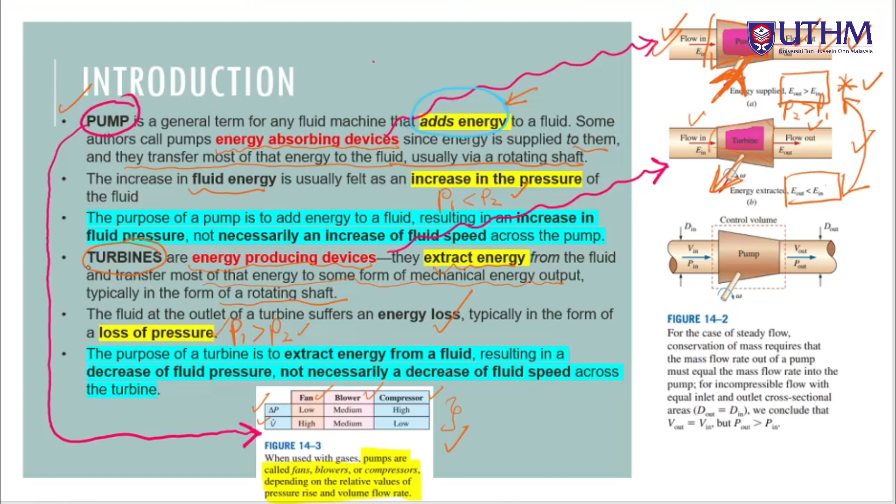Okay, which means that the fluid at the outlet of a turbine suffers energy loss, typically in the form of a loss in pressure. That is why P2 can be considered much lesser than P1. So you guys need to understand what is the differences between pumps and turbines. So they are opposite. Okay, so next kita focus on pumps.

So in details, you guys tak perlu tahu banyak sangat. Kepelbagaian pumps ni pun you guys boleh tengok dekat YouTube lah. So in this chapter kita bukannya nak fokus sangat kepada perbezaan pumps. Cukuplah sekadar few yang saya akan tunjuk kemudian. Yang lain-lain tu, as long as you guys know that there are variety of pumps, that it should be enough.

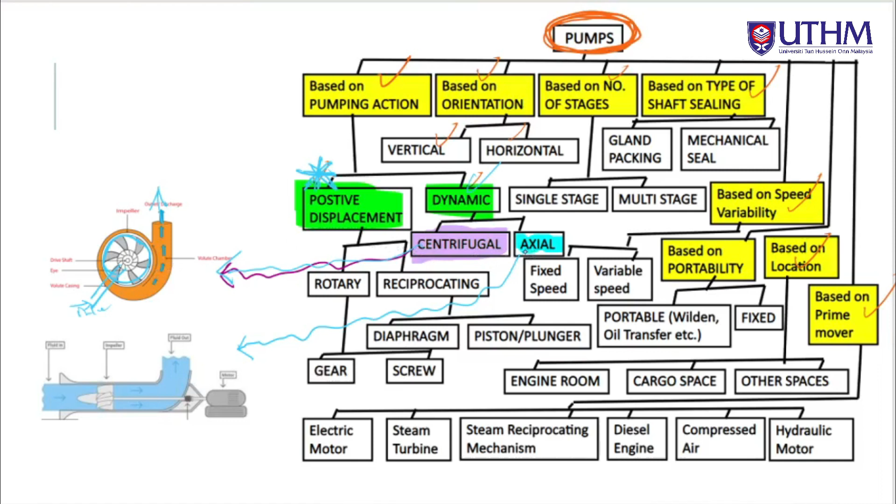Untuk axial pump pula, dia lebih pada straightforward lah, okay, inlet and outlet. Lepas tu kat tengah ni impeller dia bergantung lah kepada bentuk dia.

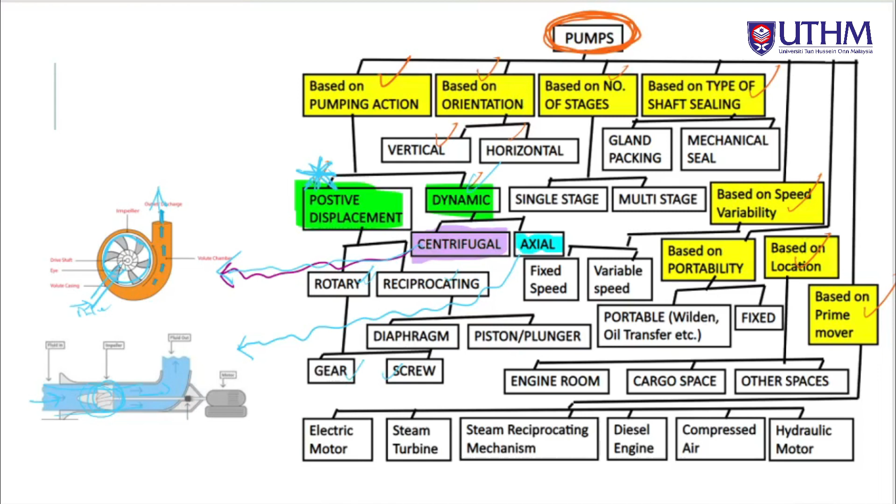Alright. So okay. Kalau kita tengok dekat sini, bila cakap pasal positive displacement ni, dia pun ada dia punya bentuk-bentuk juga, sama ada rotary ataupun reciprocating. Okay, so bila rotary ni pula ada bentuk-bentuk gear dia, gear, screw and so on so forth lah. Okay, banyaklah perbezaan dia dari segi dia punya classification. So this is the positive displacement pump.

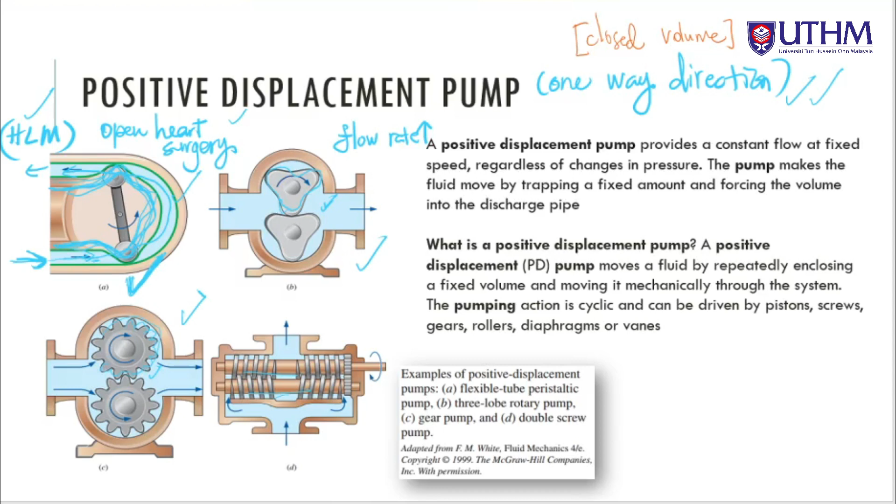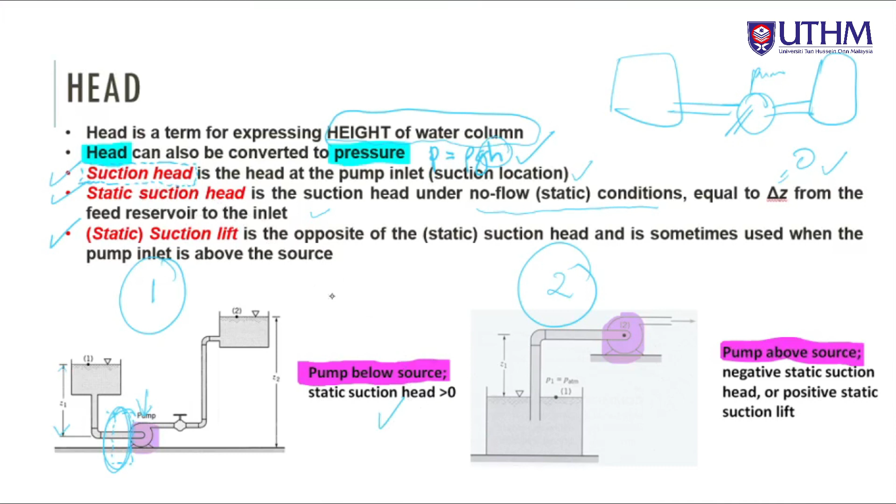So if let's say the position of the pump is much lower, this would be the situation in which static suction head will be more than 0. And then there's the second case which we consider as static suction lift, which is actually the opposite of the static suction head, and is sometimes used when the pump inlet is above the source. So we see the pump inlet is also higher than its source. This is sometimes called a positive static suction lift or negative static suction head, which is the opposite of the static suction head.

So we see here there are two, so don't be confused about these two definitions. They're the same. If you want to use a static suction head, you can either say positive or negative. If it's like this, it's positive. The first condition is a positive suction head. If it's here, negative suction head or positive suction lift.

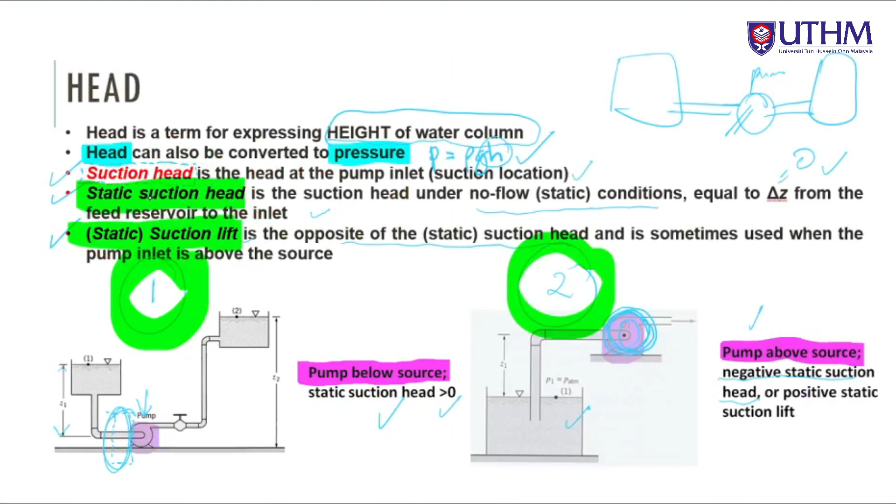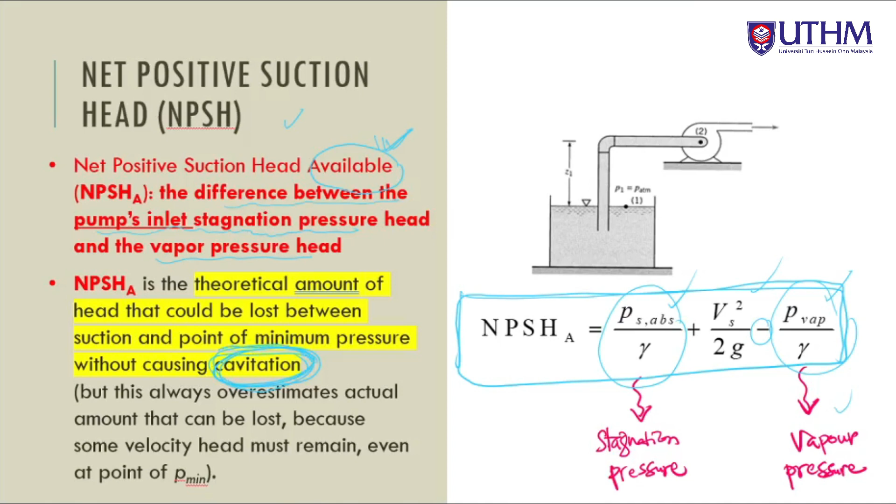So how can this cavitation occur? So it will occur when the local pressure inside the pump is much less than the vapor pressure of the liquid. So maksudnya vapor pressure dalam liquid tu sendiri, vapor pressure dia lebih tinggi daripada pressure dekat pump. So this is called cavitation bubbles, in which the liquid boils locally.

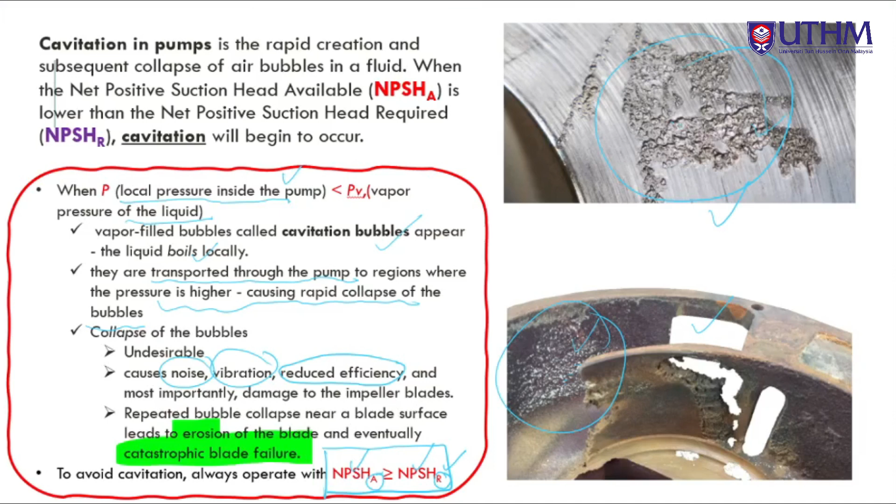In order to avoid this cavitation, all the bubbles that are trapped in the impeller and cause this catastrophic blade failure, the suction head available must be more, or at least the minimum should be equal to the one that is required. Okay, next, this is the net positive suction head required. Yang ni yang required tu lah. It is actually the minimum value of NPSHA, sebab kita cakap tadi kan, NPSHA must be more than or equal to NPSHR. So it is the minimum value of NPSHA that is needed to prevent the cavitation.

Okay, so usually this NPSHR that is required ni adalah spec yang diset up oleh manufacturer. Okay, and it is determined experimentally by pump manufacturers and reported as a function of pump flow and so on and so forth lah. To avoid cavitation, the pumps always need to operate with NPSHA more than or equal to NPSHR. Yang ni kita akan go through lebih detail lah bila kita tengok pump performance curve.

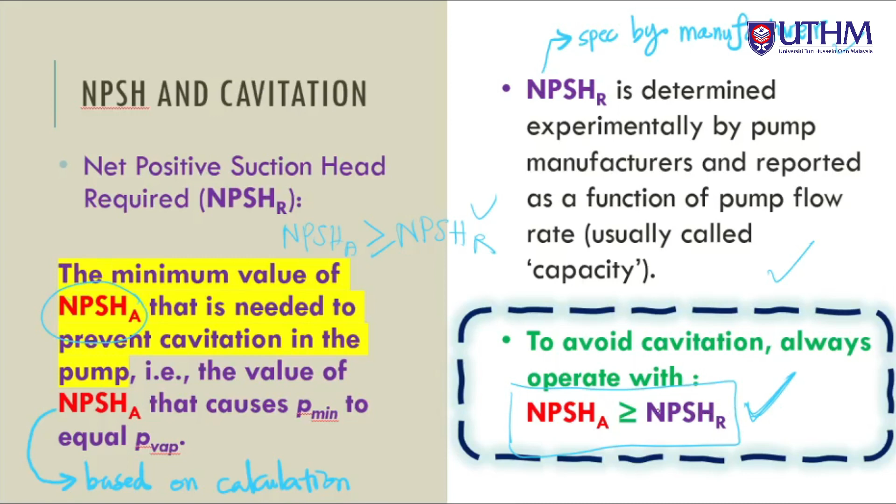Alright, so the maximum allowable elevation of a pump. So yang ni kita nak tengok berapa jauh tinggi Z1 ni daripada this reservoir, daripada inlet kepada pump ni, berapa maximum allowable elevation of a pump based on theoretical knowledge yang kita dah tahu tadi, NPSHA must be more than or equal to NPSHR. Daripada sini kita boleh determine the maximum allowable elevation of a pump. Berapa tinggi pump ni boleh kita position daripada dia punya reservoir.

Okay, so rumus yang kita dah tahu tadi kan, NPSHA equals to this. And then this absolute stagnation pressure kita boleh ganti with this term, in which kita consider this suction lift, this elevation kat dalam this equation, and then kita minus all the losses juga, and also the kinetic terms, and then kita replace balik masuk dalam this equation. Kita akan dapat in the end this. So this is actually the NPSHA, which itself must be more than or equal to NPSHR.

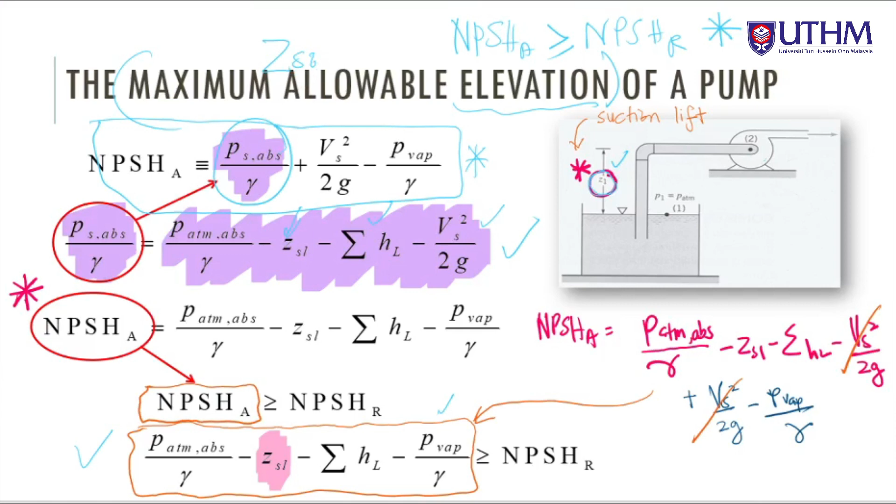So the one that we would like to determine is the maximum allowable elevation of a pump, which is the elevation of suction lift lah, ZSL. So kita just rearrange so that ZSL is what we wanted. Thus this suction lift must be less than the expression on the left. Okay, so yang ni mesti less daripada ni in order to avoid cavitation, kan?

Sebab rumus yang kita guna, saya ulang banyak kali lah, NPSHA is more than or equal to NPSHR. So dari sini kita rearrange, kita dapat ni. So this ZSL must be less than or equal to the left hand side terms, so that expression indicates the maximum allowable suction lift. Berapa maximum elevation of the ZSL can be positioned above the reservoir. Okay.

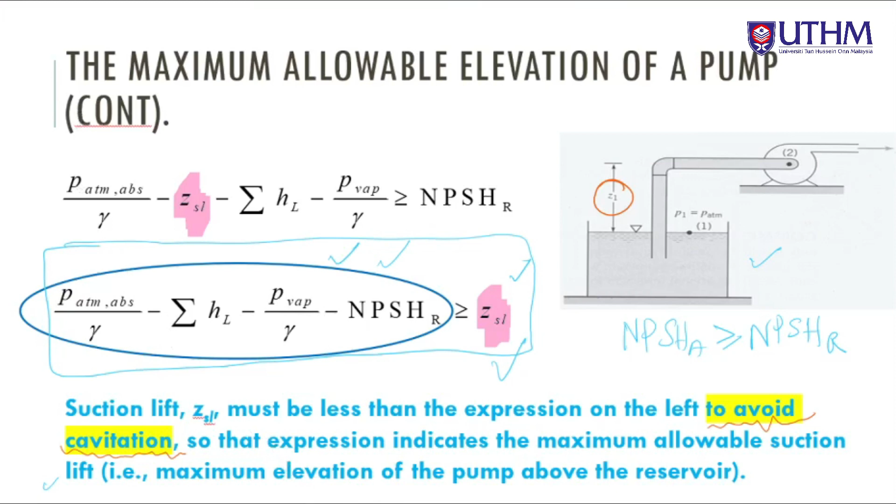Okay, now let us continue untuk chapter 7 ni. Okay, sekarang kita masuk kepada pump performances. How we describe or kita judge satu-satu pump performance tu. Okay, so for incompressible flow, it is more common if let's say kita guna volume flow rate. Selalunya kita akan guna volume flow rate lah, as compared to the mass flow rate.

So what is the, orang panggil dia punya simbol for the volume flow rate adalah V dot ataupun Q lah. Okay, kita can use either one. Kalau mass flow rate is M dot. Okay, so in the turbomachinery industry, this volume flow rate is sometimes called as a capacity. So this volume flow rate can be also considered as capacity, and is simply mass flow rate divided by fluid density. So this is the equation lah. Okay, the volume flow rate equals to the mass flow rate divided by the fluid density.

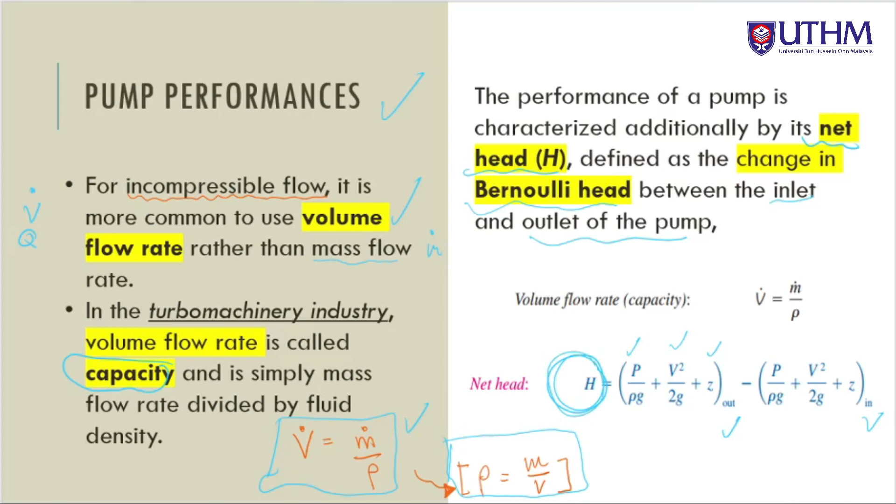And the performance of a pump is characterized by its net head. Okay, net head, which is defined as the change in the Bernoulli head between the inlet and the outlet of the pump. So basically nak dapat the net head ni, the net head equals to outlet punya energy minus the inlet punya energy, and the equation is sama lah, P over rho g plus V squared over 2g plus z, minus dekat inlet punya energy. Okay, this is the net head yang kita guna pakai untuk assess the performance of a pump.

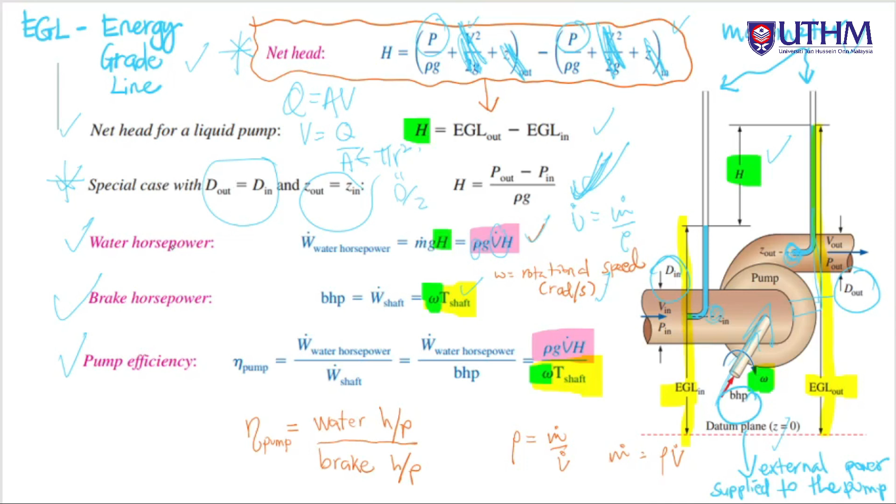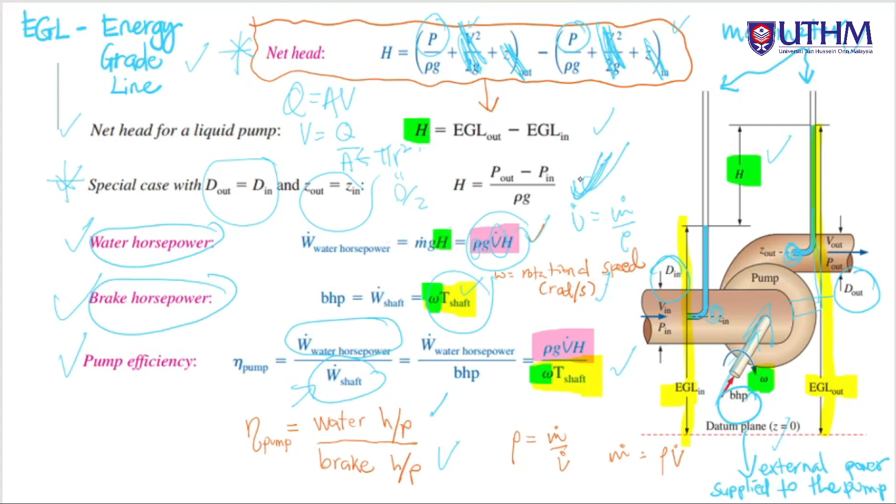Alright, and then the pump efficiency equals to the water horsepower over the brake horsepower. The brake horsepower is what is given, sepatutnya the maximum. Water horsepower ni apa yang dah diguna pakai dalam pump tu. So this divide by this, kita dapat the efficiency of the pump. Water horsepower divide by the brake horsepower. This is how we calculate the efficiency, which is represented by the graph tadi.

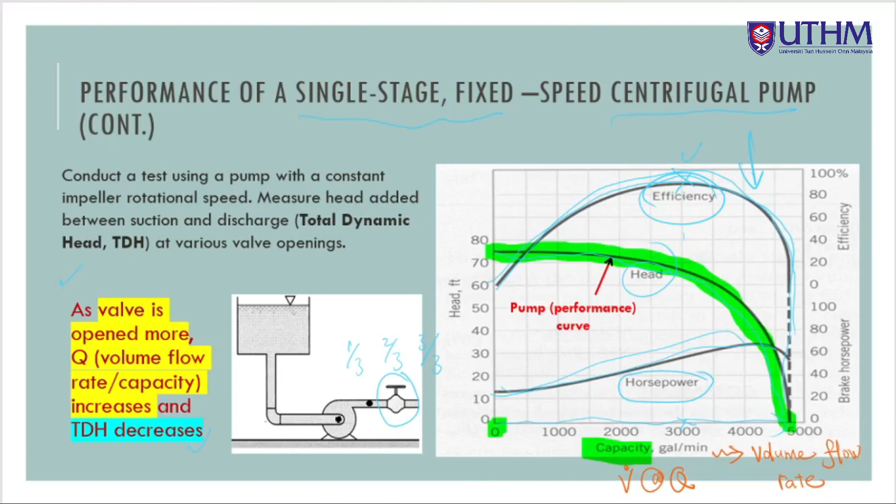Alright, and then this is the pump performance curve in general. Kalau kita tengok dekat graph ni, kita boleh extract banyak maklumat. Dekat sini kita akan pecah kepada tiga important parts, sekejap, saya nak guna color apa ni. I use this color, light grey. So kita akan discuss what happens at the free delivery, what happens at the shutoff head, and what happens at the BEP, at these three locations.

So first of all, kita consider pump free delivery. At pump free delivery, this is the maximum volume flow rate. Paksi X adalah capacity ataupun volume flow rate. Dekat paling tinggi, head is 0. H will be equal to 0 on this blue line graph. So this flow rate is called the pump's free delivery. Maksud dia at maximum ni pump macam tak diguna pakai, that is why head is equal to 0. Free flow dalam pipes tu. No flow restriction at the pump inlet or outlet, no load on the pump. So bila no load, no head dekat pump tu.

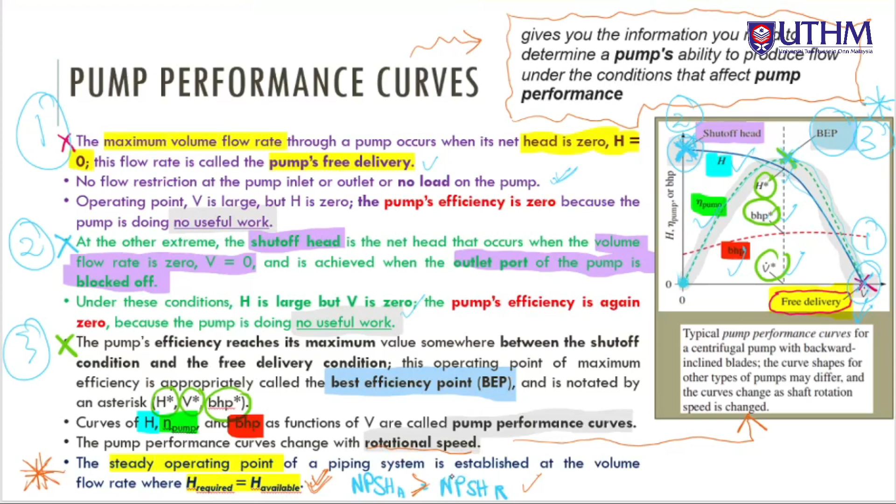Okay, so this part pula macam mana kita nak matching a pump to a piping system. Kita ada satu piping system. Piping system kita pula bukannya macam horizontal satu bentuk je kan. Dia bermacam-macam bentuk untuk meet requirement dekat satu tempat tu. Okay, so in this slide dia akan tunjuk macam mana kita nak match this pump into this piping system.

Okay, so a general piping system with elevation, dia mesti ada elevation change, ada major and minor losses, and fluid acceleration. Kalau kita tengok dekat sini kan, elevation mesti ada lah kan. Lepas tu major and minor losses, apa yang kita boleh tengok kat sini. So major losses dia of course daripada friction lah dalam pipe tu. Lepas tu minor losses dia daripada this valve, or also the orientation of these elbow pipes and so on kan. Okay, and also the fluid acceleration. Okay, so in order to find the H pump atau H required, and for the spec of the pump, the H value yang kita nak dapatkan kat sini kan, H required atau H pump tu kan.

So apa kita kena buat, kita guna rumus Bernoulli, biasa rumus ni lah juga. Okay, in which untuk yang ni kita dah combine dah sebenarnya daripada rumus ni. Okay, so kita ada pressure terms, the kinetic terms, the elevation, and also the total loss. Total loss ni yang they include major and minor losses. Okay, where we assume that there is no turbine in the system, although that term can be added back if necessary. So if turbine, kita kena consider jugalah.

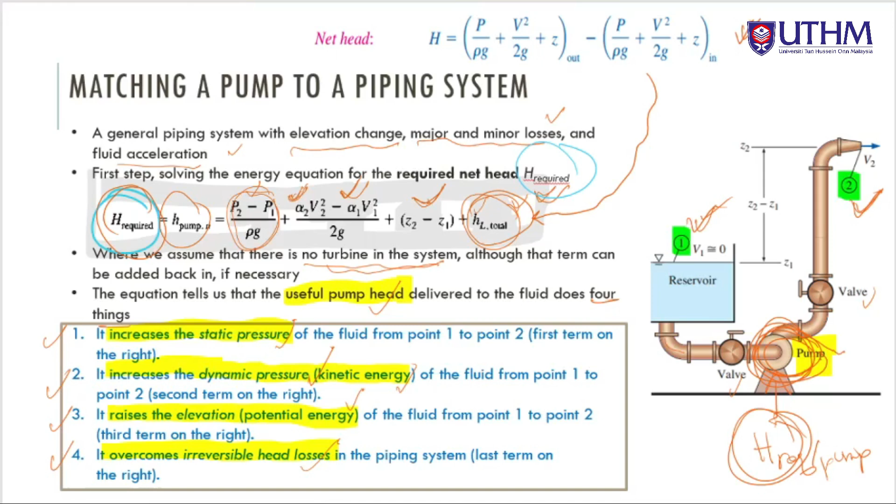Okay guys, before we end this chapter, I'm going to show you one example of questions related to this topic. Seperti yang saya dah cakap sebelum ni, bila kita kata pump system, dia mesti ada interrelated dengan pipings, kan? So chapter 7 pumps dengan chapter 6 last time is analysis of flow in pipes. So mesti ada interrelated. Dalam satu-satu soalan tu kita kena masukkan kedua-dua kefahaman kita waktu flow dalam pipes dengan penggunaan pumps dalam satu soalan yang sama.

Contoh adalah soalan ni. So soalan ni agak panjang, so it might take time lah untuk sama-sama kita fahamkan. Okay, tak apa, kita go through satu-satu. So the question, a local ventilation system which includes hood and exhaust duct. So kita ada hood dekat sini, lepas tu ni semua exhaust duct lah. So yang ni is used to remove air and contaminants produced by dry cleaning operation.

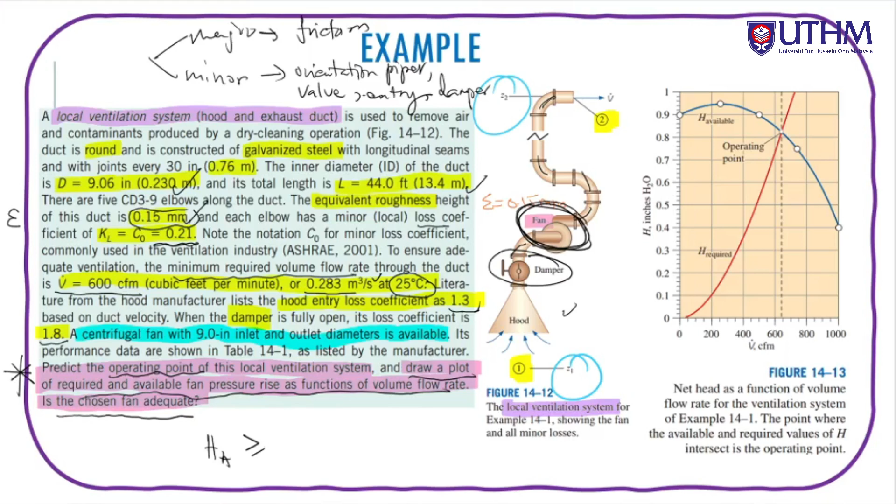Kan kalau kita cakap dulu last time, in order to avoid cavitation, HA must be more or equal to HR. So available operating head, operating point dia mesti lebih besar atau sama dengan HR. So HR ni adalah minimum value untuk HA ni. Alright, so ini sepatutnya untuk soalan ni you guys need to draw this graph lah.

This is, kalau semua masih ingat, this is the pump performance curve. Okay, this is given actually, cumanya kat soalan ni maybe dia tak complete, so this is actually given. Kan dia kata kat sini apa? Draw a plot of required and available fan pressure rise as a function of volume flow rate. And this is the volume flow rate, the x-axis, and the y-axis is actually the operating or available head lah. Tapi yang ni kita tengok dalam unit water, okay.

So how do we start? Okay, firstly kita kena dapatkan poin-poin penting lah. Kan kalau kat sini actually dekat soalan tu dia bagi alpha is equal to 1.05. Kalau ingat alpha apa? Correction factor untuk velocity. Velocity adalah velocity of the air yang masuk ke dalam fan tu lah, okay, yang dalam piping system tu.

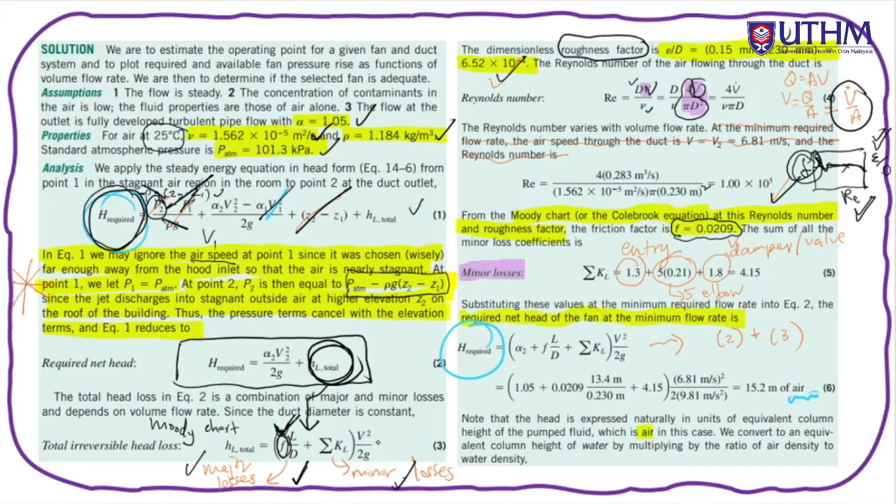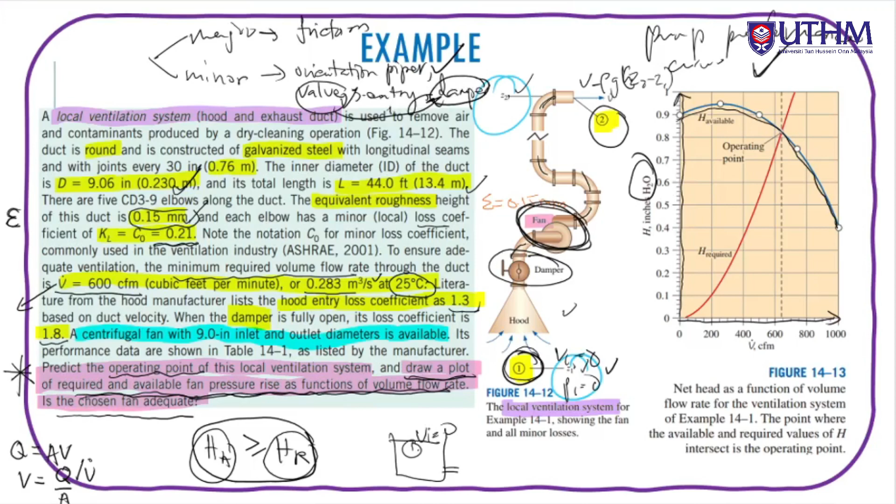Okay, so actually daripada sini kita dah settlekan untuk major losses sebab kita dah dapat value of F. And then we move on to the minor losses pula. Minor losses ni kita kena refer balik apa yang ada tadi. So kita ada orientation, first orientation, and then kita ada valve. Kan? Sebab valve tu adalah damper lah kalau kat sini. Dia sama. Lepas tu kita ada entry losses tadi kan. So ada 3 terms yang kita kena consider. In which first the entry losses given kan, KL tadi. Lepas tu 5 kali elbow punya losses and also the damper ataupun valve punya losses. So kita add on semua equals to 4.15 untuk these terms.

And then V squared over 2G kita replace balik. Okay, so kita dapat yang ni. So kita masuk balik ini dalam equation. Okay, so kita dapatkan value ni. Okay, so untuk alpha ni pun given jangan terlupa 1.05 kat sini. Sebab kita ada benda ni. Betul tak? Okay, so benda ni dia terkeluar lah kat sini. Okay, jangan lupa sebab yang ni H total je.

H total. So kita nak H required. So kita ambil A ni. Masukkan. Oh, tadi saya tersilap, so A ni bukan dari sini. Ini adalah dari sini. H required. The required net head. So kita ada this term and this term. This term and this term. Kita replace lah 0.0209, 13.4 over 0.23. Yang ni 4.15, ni 1.05. So V adalah dari sini lah. Okay, kita dapatkan value kat sini. So kita selesaikan semua ni untuk kita dapatkan nilai V dia. Kita dapat 6.81. And then kita dapat the value.

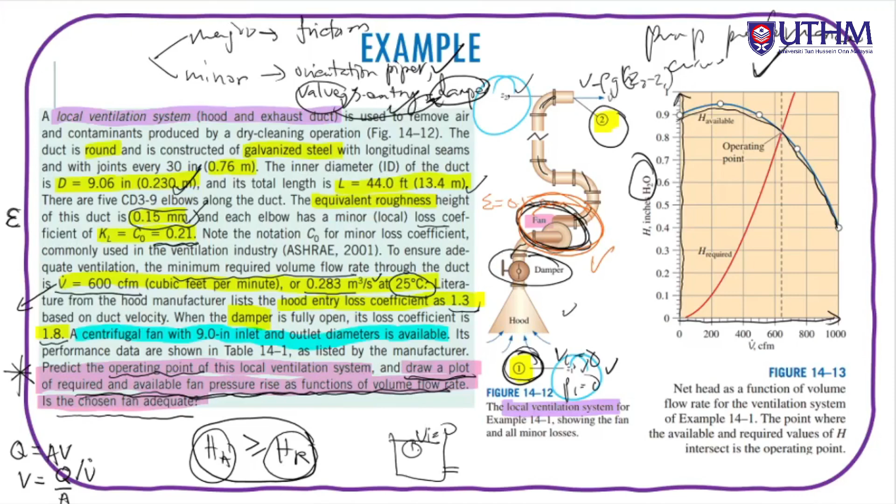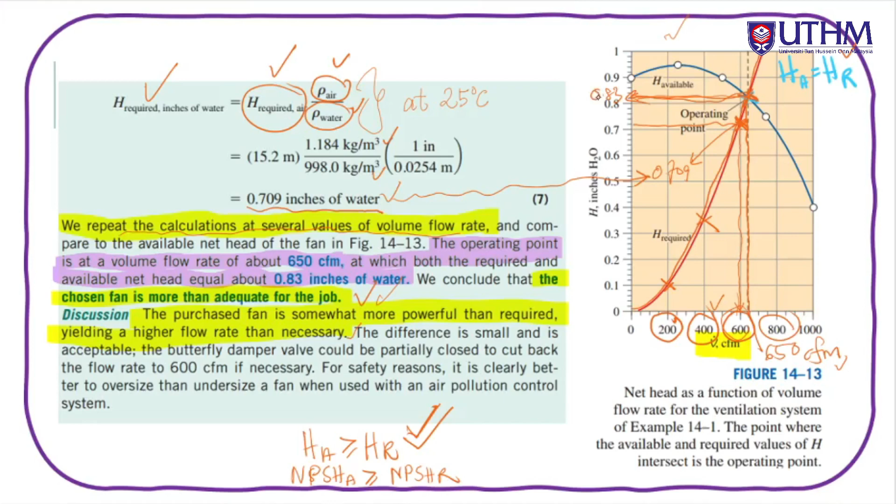Kita guna konsep apa yang kita faham dekat chapter 6 dengan additional items, especially on this pump performance curve lah, untuk kita fahamkan macam mana kesesuaian satu-satu pump tu dalam sistem perpaipan tu. Okay, so that is all for chapter 7. Thank you.